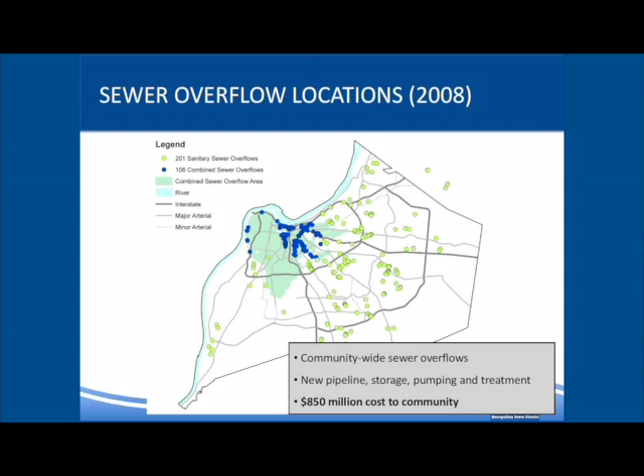On this slide, those in the lime green color are what we call separate sanitary system overflows, located out in this area. The blue ones are what we call combined sewer overflows. I'll explain the difference between the two, but the focus tonight is going to be on those combined sewer overflows, shown as blue dots in this part of the system.

We have approximately 106 of those, and we also have about 201 separate sanitary sewer overflows in our system. These overflows are community-wide and are subject to the consent decree projects you've heard about. There's a whole set of projects being used to remedy them, which I'll talk about momentarily. It's going to be about $850 million worth of expenditures for this program.

And it is a program that is not federally funded. It is funded by the MSD rate base. So we wanted to make sure you understood the motive and history of the overflow program.

Those overflows are something that in 1972 the Federal Clean Water Act was enacted by Congress and put into law, and a part of that Clean Water Act called for the elimination of sanitary sewer overflows. Translation: sanitary sewer overflows are illegal. It also called for the mitigation or control of combined sewer overflows in our communities. Under this program we are required to eliminate sanitary sewer overflows and control or mitigate the volumetric discharge of combined sewer overflows in our system. It is federal mandate, it is federal law, and failure to meet those dates will result in stipulated penalties and fines.

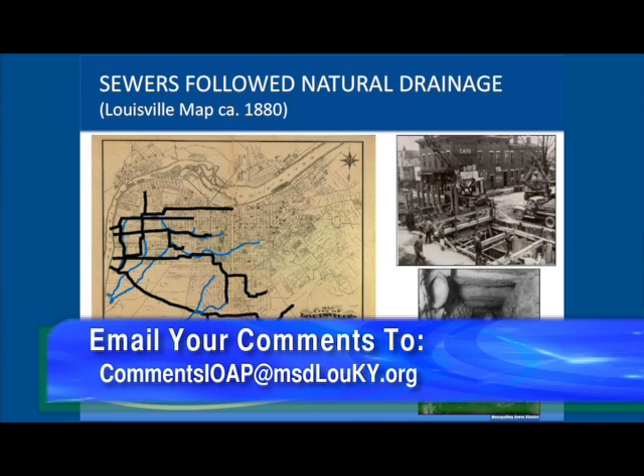Another historical point, what this map shows you, this is sort of the base map of Louisville around 1880. As you can see, there are some existing blue lines that were existing streams within the city system back around 1880. In the early 1900s we started building pipes to take on drainage and stormwater and move wastewater away from populated areas. Those pipes are shown in the black lines, and some of those pipes replaced some of the existing blue lines that were part of the system.

They were old brick sewers that were built in streams, and they became what we call combined sewers, taking both stormwater and sanitary water away from populated areas. At that time, those flows actually were piped directly into the Ohio River.

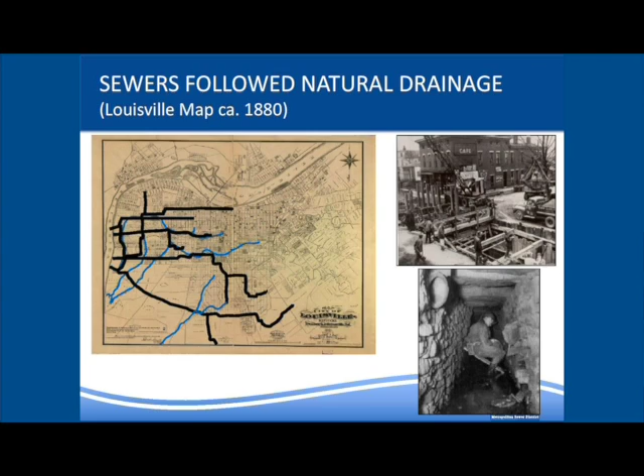So when you talk about the issue of drainage and sewers, it is a 100-year story. It's a story that infrastructure, not only in Louisville but across the country, are faced with aging infrastructure and issues brought on by federal mandate. An example would be we've got an $850 million program here in Louisville. The city I came from, Cincinnati, had a $3.2 billion federal mandate. So these programs and mandates are affecting a lot of Midwest and East Coast cities, and this is the primary history on it.

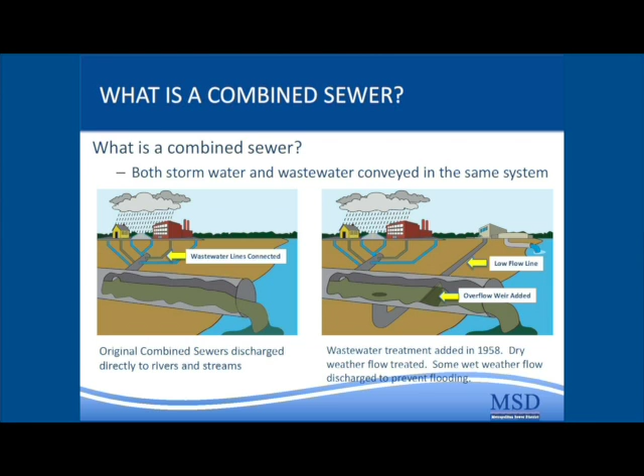We began the installation of treatment around 1958. A lot of the treatment goes to our Morris Forman plant, particularly in this area of town. But the difference is the separate sanitary system normally does not take on stormwater. The combined sewer does. The combined sewer technology was something built over 100 years ago, the best technology of the day, and in 1972 the Federal Clean Water Act changed that.

So when you think about combined sewer overflows or sanitary sewer overflows, our focus is what type of toolbox do we have to deal with these. There are really two types of projects we identify. One is what we call source control projects, projects that allow us to deal with stormwater or rainwater at the source, by the use of what we call green infrastructure - rain gardens, bioswales, those type of things. Focusing on source control with downspout disconnections on properties, residential homes, making sure sump pumps are not connected into the system because that is direct rainwater, and also sewer rehab to make sure our aging system through rehab or pipe replacement is not taking on a lot of infiltration. That's the source control approach.

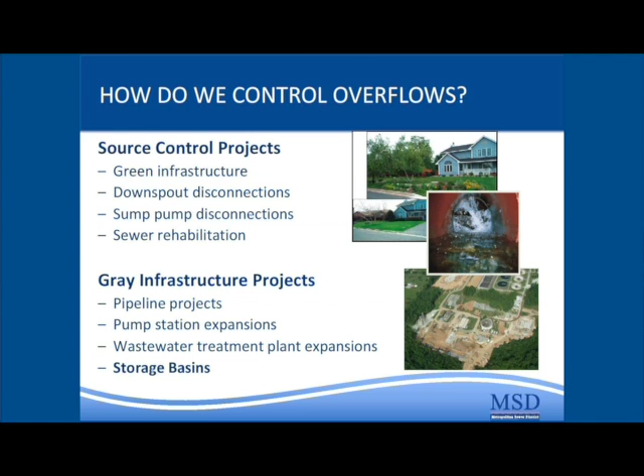The other approach would be what we call gray infrastructure, and these are more of your hard, large, complex pipeline projects - expansion of existing pump stations in our system, expansion of our wastewater treatment plants, or building large storage basins, which is the subject of this particular project tonight. That would be a gray infrastructure project.

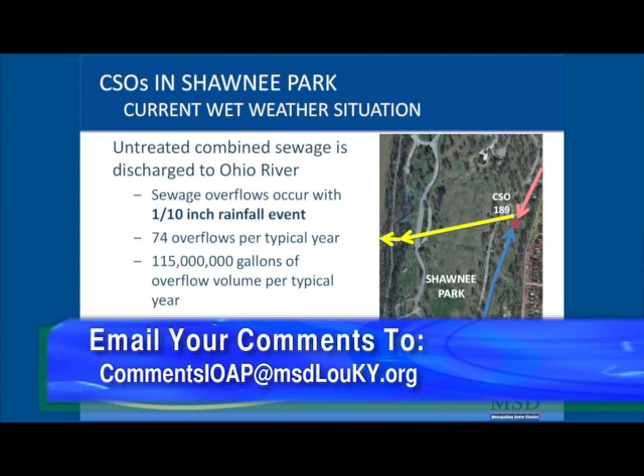As you drill down even further, the problem is there are identified combined sewer overflows that exist right at the Shawnee Park area, down in the Broadway area. Those large CSOs are CSOs that even if we get a tenth of an inch of rain, you will see overflow directly into the Ohio River. Volumetrically, you're talking about 115 million gallons of overflow in a typical year. Our objective with the projects we bring forward is to mitigate or reduce the amount of overflows from about 74 times a year down to about 24 times a year with this proposed basin.

If we go to the next slide, the project that we are designing in the concept phase is what we call a CSO storage basin. We'll just go conceptually on this slide to show what it's going to look like.

It provides temporary storage for wet weather overflows that otherwise would be directed to streams, creeks, or rivers. Once the storm or weather event subsides, we are then able to pump that wet weather back into the combined sewer when capacity is created, and then down to our Morris Forman Treatment Facility.

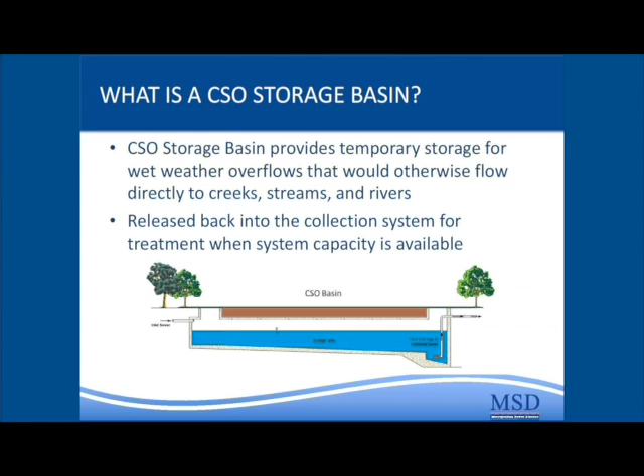Under the ground, about 40 to 50 foot deep, you're going to have a basin that takes on wet weather from two existing tunnels that already exist under Shawnee Park. This wet weather, the blue indicates the water, will be pumped back into the system once the storm event passes.

Some of the questions we've gotten regarding this project: will it create the potential for backups? The basin is designed to make sure that it's at an elevation that is going to be below basement elevation.

So no, it will not be a problem in terms of increasing potential for backups. However, we don't know the intensity of storms in the future—call it climate change, call it whatever. So no project, gray or green, is ever going to give you a 100% guarantee that there will never be flooding or issues, because we can't predict Mother Nature.

What happens when the basin is full? The system will function as it does today. When the basin fills up, water is reverted into the combined sewer system, will overflow and discharge into the Ohio River. That is if the basin fills up.

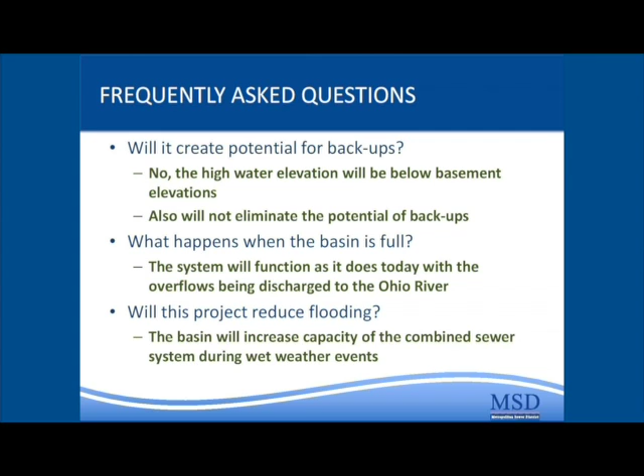Will this project reduce flooding? The basin will increase capacity in our combined sewer system, and during a rain event, when that capacity returns, it will have the potential to take on more water and alleviate flooding.

In our discussions with Metro Parks and other stakeholders, that particular building has potential to be sort of a foundation or a staple for other assets, and we'll talk a little bit about that later in the presentation.

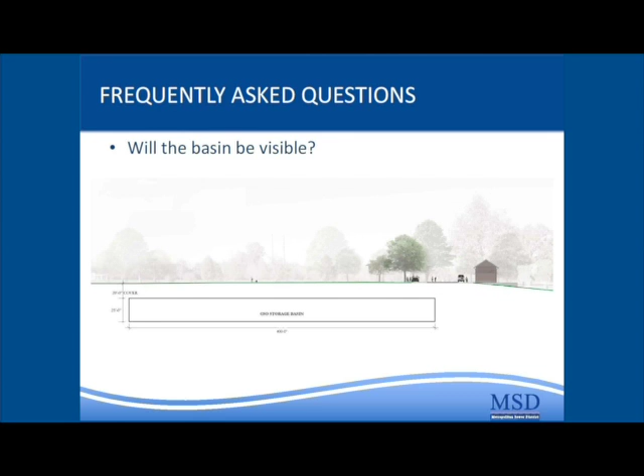But essentially, this is what it's going to look like from a cross-section view—again, something that is going to be 40 to 50 foot underground. It will be covered, and really the only thing folks will see is this building and our access hatches, which will probably be located on the same side of the building, similar to a one-story garage building. So that's what it's going to look like.

The other questions we get: what about odor? This project is mostly stormwater, highly diluted during a rain event.

It is underground, it is covered, and it will be equipped with rinsing equipment as part of the design. We've also seen that for these types of projects, odor control is not necessary because of the dilution of the water. But in this particular case, we are going to be proactive.

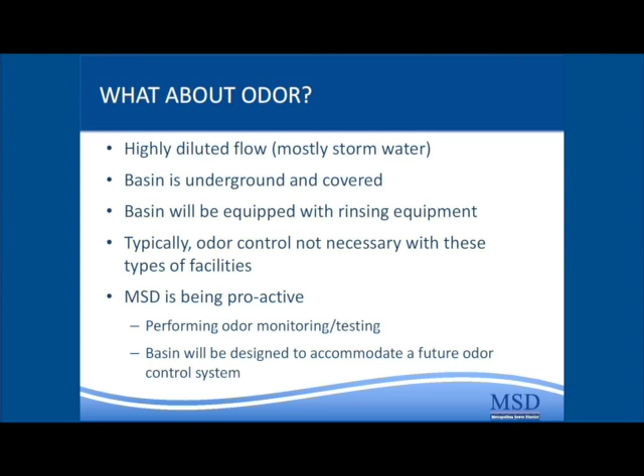We are going to have monitoring and do some type of odor assessment. We're also going to have the potential for future odor control built into the design of the project to make sure we can accommodate that if necessary. So we don't see that this is going to be an issue, but we are going to take steps to make sure we can incorporate that if needed.

So, the project itself is a component of our consent decree. The storage volume is 20 million gallons, as I mentioned before, able to reduce or mitigate the amount of times overflows occur on an annual or typical year basis from 74 to 24.

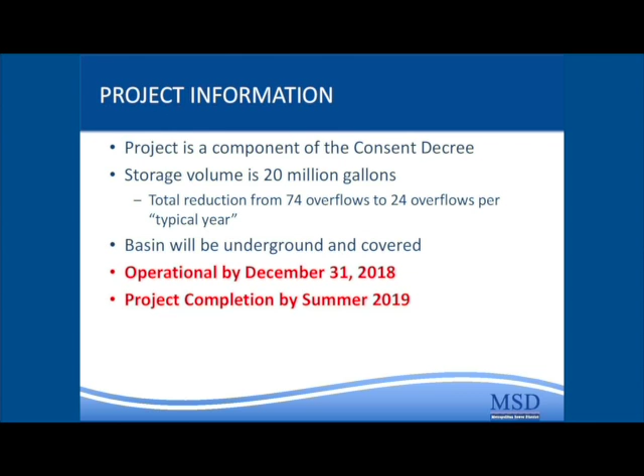It will be underground and it will be covered. The project needs to be completed and operational by December 31st, 2018, and complete construction and restoration by summer of 2019. So those are the basics of the project.

I do, at this time, want to turn it back over to Mr. Lockley, who's going to get a little bit more into where this thing is going to go and a little more detail on the design.

What you see here is we had to come up with some general sizes and general locations of where this basin is going to be. We had to come up with some preliminary areas and preliminary sizes so that we could come and talk to you guys. But predominantly, as Tony was talking about, the big issue is that we have the sewers that are in the area. That large pipe is here and the large pipe is here, so we have to collect that sewer somewhere in that area. That's why our basins are in that area.

Basically, the best two locations for our basin that we could talk about today and hope to get input from the public are these two locations. Location A, as we're calling it, is where the existing maintenance facility is, at the intersection of West Broadway and the Parkway. Basin B, the second location, is in what is referred to as the Great Lawn, or inside Loop Road.

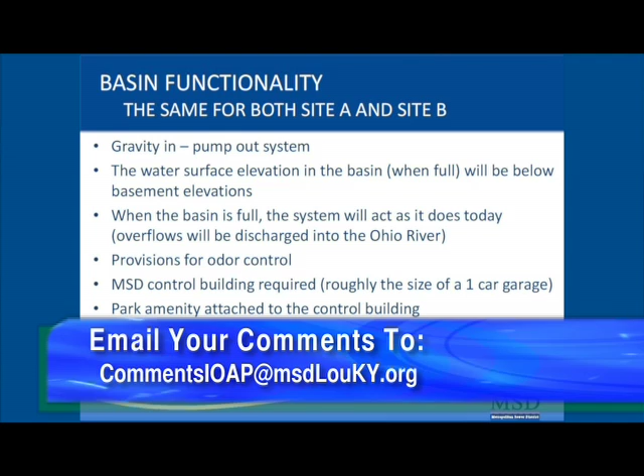So just some functionality with both basins. Some of the things that are the same with both basins, no matter where they are: these basins are going to be a gravity-in and pumped-out system. What that means is they will fill up, and then once the system is able to take the flow, there are pump stations in the basins that will pump and empty it out, very similar to a very large sump pump if you have one at your house.

That's the reason why we have to have a control building, because the control building will control the gates, the pumps, and the electrical components, and we have to have that above grade to keep the electrical components out of the ground and out of the water. The water surface elevation in the basin, when full, will be below basement elevations. We are doing everything we can, and ensuring we're doing surveys out there, that the elevation when the basin is full will not cause basement backups due to the basin being out there.

And then, as Tony talked about, when the basin is full, the system will act as it does today. Today, you basically have tunnels that are basically long basins—that's how they work today. They're 15-foot diameter, 16-foot diameter. They fill up with water today when it rains, they stay full with water, and then as the rain and storms pass, they drain. So it's going to work the same as it does today.

The one thing about the basin—and the other reason why it's designed this way—is because of the odor issues. Typically with these types of systems, the odors come from stagnant water that's allowed to stay for a long period of time and become septic. These basins are designed to keep the flow moving, and they're designed with the pumps to be emptied within 24 hours, so there will not be the opportunity for anything to remain in the system that could become a problem.

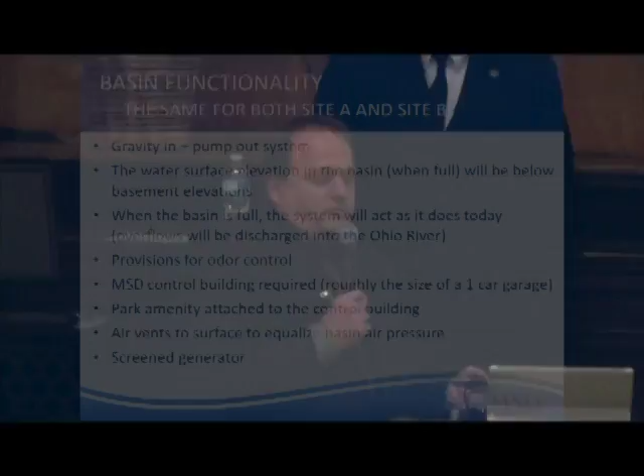Provisions for odor control: we will put everything in place. We will put the ducts, the equipment, the conduit, the power, so that if there is a situation where there may be a need for odor control in the future, we can quickly come in and insert the chemicals or the carbon canisters or whatever the odor control equipment may be. We don't anticipate any odor control, that's why we're not putting it in, but we are putting all the connections, the piping, the HVAC and everything, so that if it is needed, it's equipped. It's not quite as simple as plugging in a light bulb, but we can go on site, put the equipment in, and go forward with it.

There will have to be, as previously mentioned, a control building for either side, and it's roughly the size of a one-car garage. As Tony stated, we had to put that building there, but we worked with everybody—there are things we could do as part of that building, and leave behind, like an education center or some sort of park recreation site or something. There are some things we could talk about.

The park amenity is attached to the control building. There will be vents—this is a question that's asked a lot. Again, today, the system is vented.

This is going to be a large underground basin that is full of air. When it fills with water, that air has to go someplace. If we don't have the vent in the system, then manholes blow or the structure gets damaged. So it will be a vent system, but it works the way it does today. Those pipes, when they fill with water, the air escapes out of catch basins and out of the manholes, as it does today—no different than the way it works today.

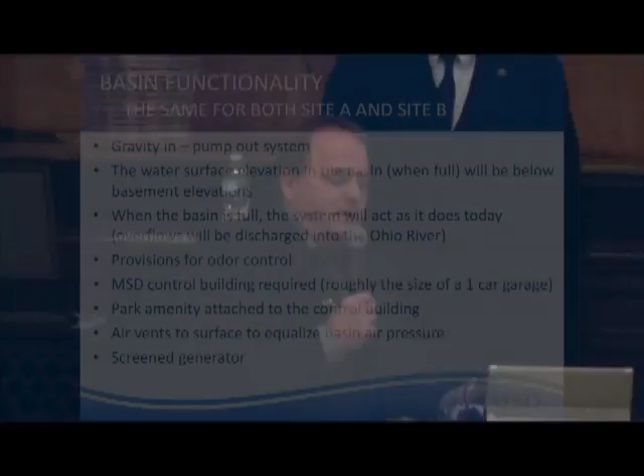And there will be a screened generator to ensure that we don't flood the site and don't have issues. If power fails, we will have a generator that will be able to operate the site 24/7.

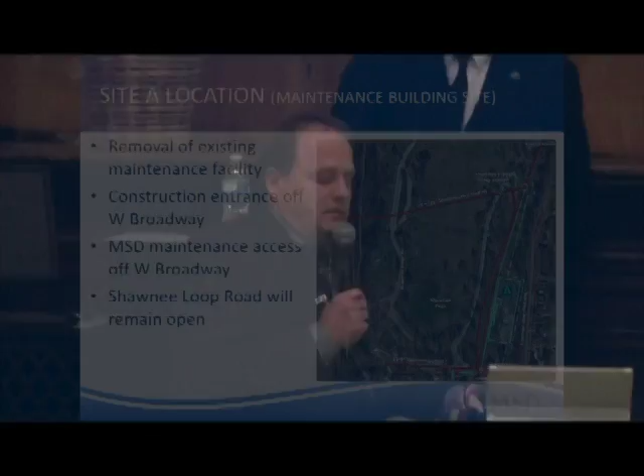So real quick, moving into the locations. Site A, again, is the area where the existing maintenance building is today. It's removal of the existing maintenance facility.

The construction entrance and the way we will get to it to do construction will be off West Broadway. The maintenance access, MSD maintenance access, will also be off West Broadway. So during construction, our equipment and trucks will be getting in and out that way. And then once it's built, we'll have to operate and maintain it—that picture you saw where the MSD pickup truck goes and operates it, that's how we'll access it. We'll basically be using the access that's there today for the maintenance facility.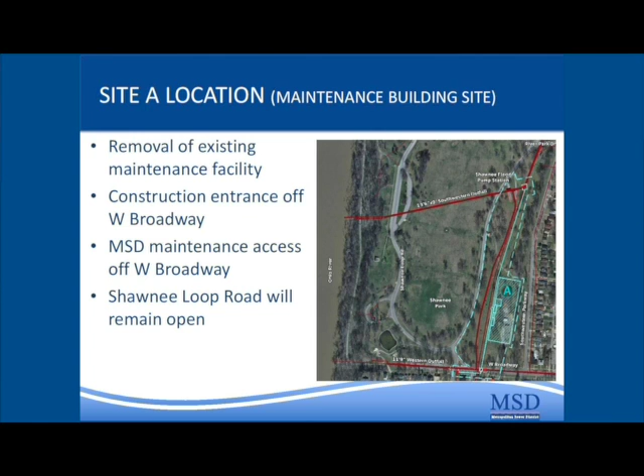Another part of this: since we are staying within the loop road, it will remain open. There is a dotted line that goes around showing the area where the contractor will be doing his work and storing his materials. All the main activity during construction of this project will be in that area of Loop Road.

So advantages: limited disturbance to the public areas during construction. The majority of that area I talked about is by the maintenance building, so it's not a big public area. It utilizes the existing access off West Broadway used by the public parks today. The Shawnee Loop Road remains open. And we avoid the flood protection system.

The further we can stay away from the flood protection system, the better, because there are pipes and conveyances as part of the flood protection system that we really don't want to get into or damage. As for our building, nothing has been established yet, but there are opportunities—we have to have the building.

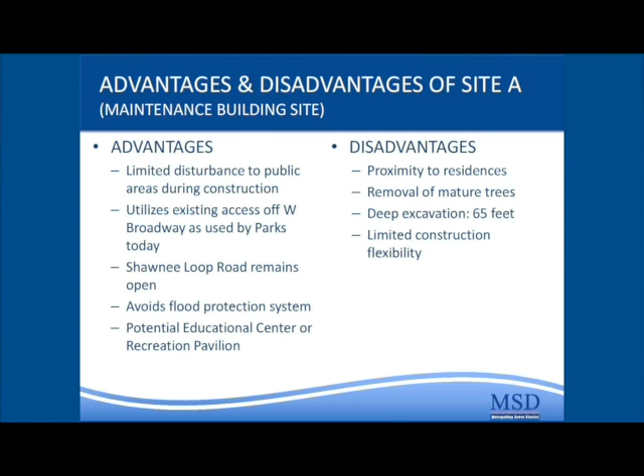We can turn that building into maybe an education center, a recreation pavilion, something that could be used by the public in the park. Some disadvantages: being that close to the corner of the intersection, there's proximity to residents. There is removal of a lot of mature trees in that one corner of the park. It's deep excavation—moving further away from the sewer pipes means we have to go deeper. And because we're staying in that corner of the park, it's limited construction flexibility.

So Site B, or the Great Lawn site. The main sewers come in here, at the flood pump station. The flood pump station was put there to help control the combined sewers, placed by the Corps engineer for a reason. This is where all the main sewers come in.

So this was the other location we could put the basin. The construction entrance would be off Southwestern Parkway. They could take the exit, take Muhammad Ali, come in, and then take River Park back out. The Shawnee Loop will be partially closed—there'll be a portion of the road that will be closed, but we can still work with parks to where you could come into the park with this access, go around, and use this other access. But there will be a portion of the park that is closed.

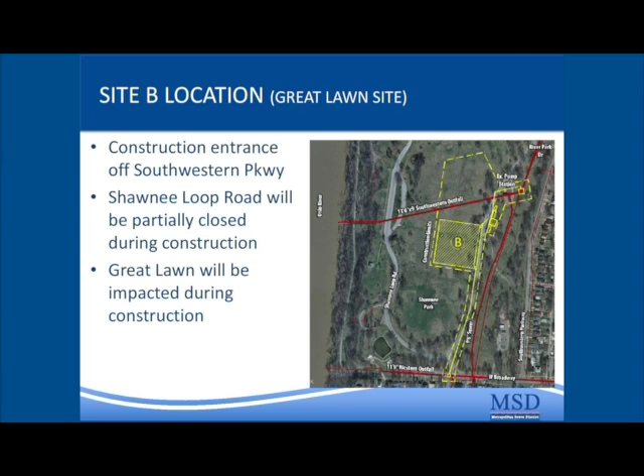And the Great Lawn will be impacted during construction. It's obvious—we're in the Great Lawn, up near our existing flood pump station where the sewers are, and some of the staging and storage area the contractor will use will be this portion of the lawn. So that's where some of that will be used. Some advantages: we're further away from residents.

They'll be screened, there'll be the trees, and the noise will be further away, pushed away from the residents. It's a reduction of tree impact.

The only real trees that will be taken out with the Great Lawn option is where we do those collector lines, where we have to go where the sewers are. It utilizes the same route that we use today to access the flood pump station, the same route we could use today to maintain it.

More construction flexibility. It's pretty obvious having the bigger area of the Great Lawn is more construction flexibility. A lot of contractors come in here and do the job. Reduced basin depth - the basin is 15 feet shallower in that area, which also helps with constructability, and the time of getting in and out.

It reduces and avoids flood protection is the same with both options. Our control building, we could possibly turn it into a potential education center or recreation pavilion.

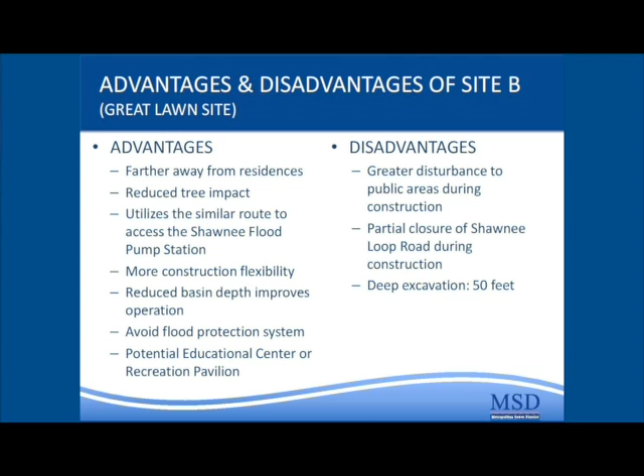Some disadvantage to point out is we are disturbing a greater area of the park. And then, as I mentioned, a section of the park road will be closed during construction. And although it is 15 feet shallower, it is still deep excavation - it's 50 feet.

And we just kind of wanted to put them back up together so everybody could see them. Again, here is Area A, the existing maintenance facility at the intersection, West Broadway, the Parkway - the area of disturbance where everybody would do their work. And then the one thing I did fail to mention in the other options, as Tony mentioned...

This little square here represents our control building. We only put it there to show you that we have to have a control building in some area. The location hasn't been determined.

So like, for example, here we have the big block that's underground - the big rectangle or the big square, that's all underground. When the restoration is done, it'll look like it does today. But as we talked, there will be a control building.

On this site, we just put it here as a reference point because it was close to the existing access road. It could be anywhere once we talk with folks and get an option. And then the same thing here, we just put the control building as close as we could to our flood pump station, figuring there was already a building there for that flood pump station. We could put that building there and work on it. But all these sites and locations can be further discussed once we know what sites we're going to be at.

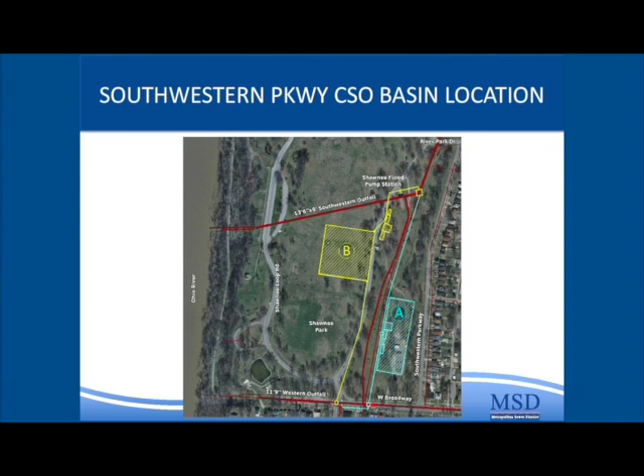Disturbance to public areas of the park during construction - being in the Great Lawn, you are going to disturb more of the park. The reduced tree impact, there will be less trees removed, and significant in the Great Lawn. It's open today - Shawnee Loop Road remains open during construction.

The entire Loop Road can remain open with Site A down in the corner. Portions of the Loop Road will have to be closed. However, maybe we could work with Parks - we've already had an idea to where they could have two-way temporary traffic on Loop Road. You can come in one way, so a section where maybe you couldn't go straight in, but you could still come in some different ways to get into it. But a section of the road will be closed.

Utilize existing access off West Broadway used by the Parks today - that's a benefit, the same access is used for Site A. Utilizes the similar road today that we use for the flood pump station - that's Site B. Reduction of depth.

We talked about that. It's also shallower for construction, but it also is shallower for our operation and maintenance. It's 15 foot less that our guys have to go in if they have to enter the basin to work on it - the safety equipment, the fall equipment, the OSHA standards that we have to get into, so it would be a shallower and more friendly operation and maintenance building.

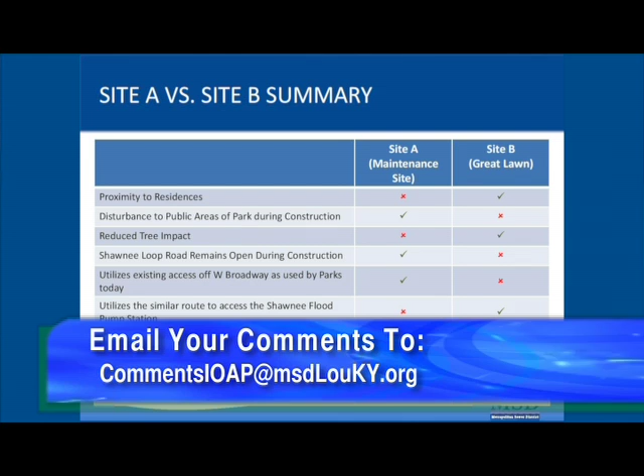Available construction flexibility - I mentioned Site B with the greater open area of the Great Lawn would have more space for the contractor to work. Potential education center or recreation pavilion, it's a positive for both - we've talked about that for both sites. And then being where we are able to be out of the flood protection system, which is a great asset to everybody, is a positive for both.

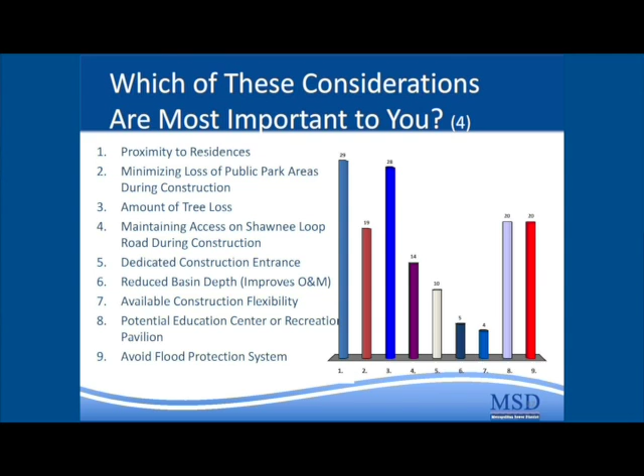So to me, the top four are proximity to residences, the amount of tree loss, and then potential education center or recreation pavilion, and then avoiding the flood protection system is also very close to minimizing loss of the public park areas.

So now very specifically, on a 1 through 7 scale, 1 being very unsuitable — no, don't want it, very unsuitable — to 7, and then we click it twice, 7 being very suitable. Please, this is the one vote. Site A, which is the maintenance building site, what would your vote be? In your opinion, is the maintenance building site very suitable for the basin or very unsuitable? And you get one vote. And again, like the other, it'll take the last one.

Why is it necessary to put it in Shawnee Park? Several sites were reviewed, and it came down to this: the further away you put the basin from those overflow locations, the more expensive it is, since you have to add more conveyance, more pipe, and more disruption to the area. Also, part of our IOAP and consent decree is that we were not going to displace homes. So if you wanted to put it anywhere else, for example on the other side of the parkway where the CSOs are, those are all homes, and they would all have to be bought and destroyed before the basin could be built. So simply, this is the area where the CSOs are, the 16-foot diameter and 15-foot diameter large pipes, that's where they are, so that's where the basin has to go.

There's a question about the trees involved in tearing it down. The preliminary estimate right now is about 5-to-1 between the two sites, maybe 4-to-1 in some areas. Once we get the exact site location and determine amenities, like whether there will be a pavilion, a building, or recreational features, we can give exact counts. But as far as tree count goes, it's about a 5-to-1 ratio, since Site A has all the trees along the parkway, versus the open field where the Great Lawn is.

Is building it in Shawnee Park the best way to combat sewage overflow, or the cheapest? The answer is yes to both. Part of our consent decree, we had to put a project in place. It's ratepayers' funds, so we had to put in not only the best solution, but also the most economic solution for the ratepayers. So the true answer to that is yes to both.

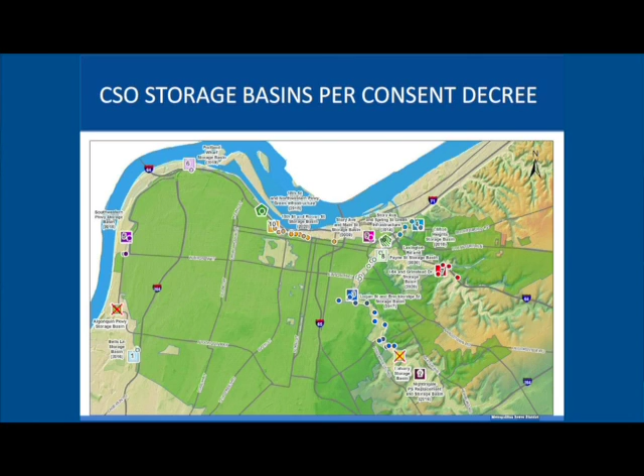The flows that are happening here, basically this is the area that used to be the old Pond Creek. That is what nature wants to do. Right or wrong, to help with sanitary conditions and living conditions in the early 1900s, we piped it, we put in a solid pipe. That is where the infrastructure and the flow is coming from. But what is coming through this area we're seeing is this watershed. These are the pipes, sewers, and the combined system that flows to this area. As you can see, this area is concentrated - you're not having a lot of flow from the east. It goes in a different direction.

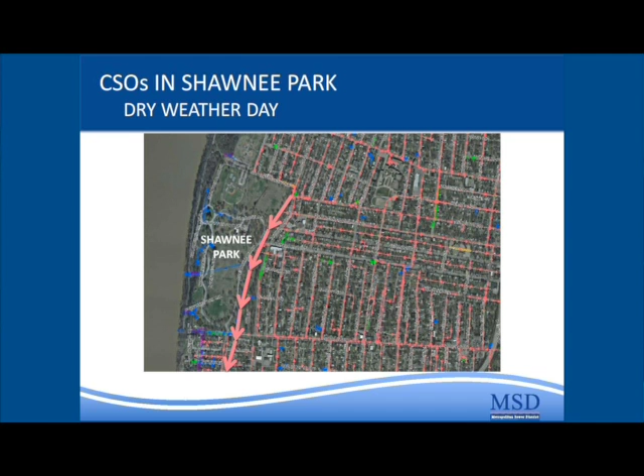What will you do when you construct a basin to make sure children are not able to fall in? How long will the park be closed in certain areas? That's a very good question. It'll be the requirement of the contractor to secure the site and have it policed. I'll knock on wood, it never happens - I've been at MSD since '91, and we've never really had incidents where people have been able to get onto our sites and have issues. Somebody has to really be determined to break into one of our sites to have a problem. So that is secure.

How long will the park be closed in certain areas? The park will be phased. The estimated construction window for this project is a total of 30 months, so that's 2.5 years. Some of the significant construction, like while we're building the basin and digging the hole, the park will have limited access just for that major construction. But once the hole is backfilled, after a year and a half or so, some areas can be reopened because we won't be doing significant excavation anymore. But off and on, areas of the park will be shut down.

Where is the line to the water treatment plant currently, and will there be consideration to dampen noise during construction? The line to the existing treatment plant is that red line—I don't have the pointer, but it's this large red line that comes down here, and that's what goes to the plant. The Broadway interceptor comes in and ties into it, and it goes into the plant. You have the western interceptor, the western outfall, and then the Broadway interceptor.

When these lines become overwhelmed, to avoid backup or overflow at the protected residences, that's where these CSOs kick in. So when the flow becomes greater than these pipes can handle—normally it can be treated at the treatment plant—but when these overflows occur, that's what goes into the Ohio River. The intent of the basin is that all that will be stored there, and then once the project is back on, for example, if it's in this location, the overflow will occur, go into the basin, and then be pumped back through this line to that sewer, which takes it back to the treatment plant.

At this location, the overflow will occur, it comes to the basin, and then it'll be pumped back to a line that would take it back to the treatment plant. So that's the other reason. The further we move these basins away from these lines, the more of those conveyance lines we have to construct.

If I did not read your question, in an attempt to help with what's going on here, a lot of them I thought had some of the same questions, so I tried to combine them. If you think I didn't do that right and didn't answer your question, please let me know.

The potential damage, as I stated earlier with the same question, is that there will be a pre-construction survey done in the area, to the homes in the area. They do video, they do survey, they do the best they can. The last thing contractors want is to go into an area and have damage to homes. It doesn't help them, doesn't help their reputation, doesn't help their bottom line and profit. So there are pre-construction surveys done out in the area. It gives us the information and the data, and if something happens, we have that data that we can compare to the post-construction or the potential concern. And if there are issues, it gets turned over to the contractor's insurance company, and it gets handled that way.

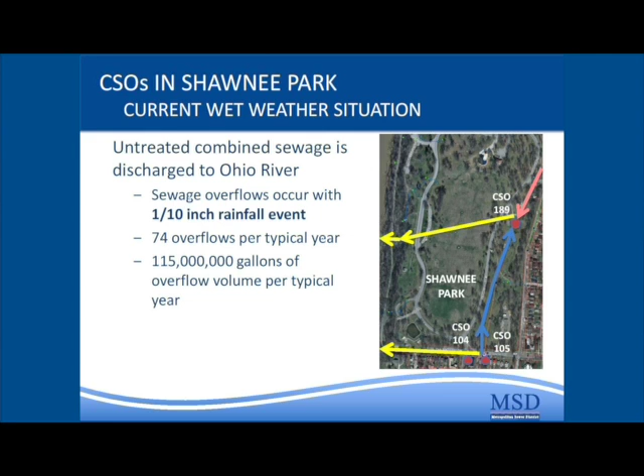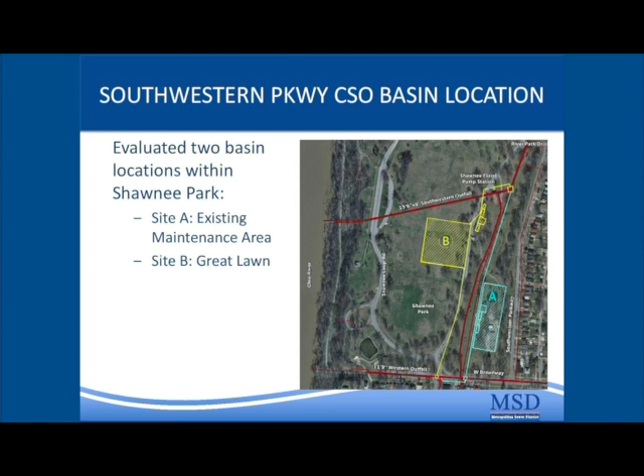And when you think about the size of these basins—20 million gallon basins—if we move those basins, all of this network of piping necessary to intercept flow from this CSO or that CSO will have to follow the basin. So whether you move this basin up here, down here, or down here, all of that piping needs to follow that basin. Wherever you go, there's going to be a swath of destruction that follows those basins. Those basins are the only remedy for the amount of volumetric overflow we're seeing on an annual basis at these CSO locations.

We know this is an impactful project. It is a large project. The problem exists with the existing CSOs, with assets that have been under the park for over 100 years. The remedy for those assets and the mandate we're facing is best located right where those problems or overflows exist. If we go back to the other slide where we saw the size of the tunnels, these are huge existing tunnels. The farther we move away from those systems, the more we have to have adequately sized piping to get to the basin or the reservoir. So these are tremendous tunnels—you can see with someone standing there, these are not very small pipes.

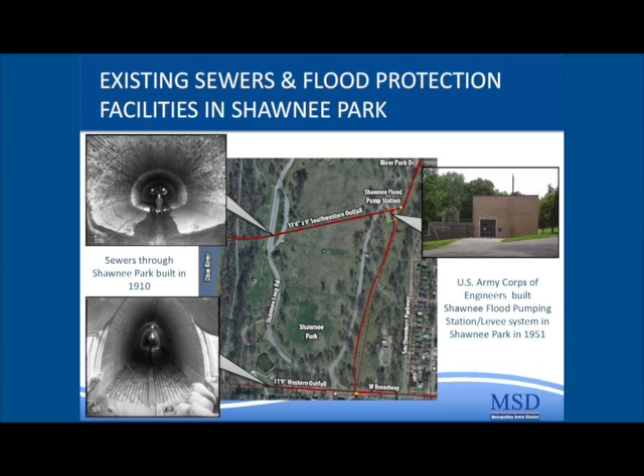These are huge infrastructure assets. And so the farther you move it away from the combined sewer overflow, the swath of destruction becomes larger. And so that's why we're trying to get through the concept phase and addressing the problem, and the problem exists at this location where the CSOs are. And again, it's a remedy or a tool that we're using throughout our system for other CSOs, and there's a total of 9 or 10 of these basins being built throughout the district.

One of the things we want to be able to do is come back in December, but in order to do that, we do want to go back. I know a lot of you still have your clickers with you, right? We've gotten through a lot of the questions. We want to go back and allow you to use the clicker again regarding Site A versus Site B, and also the process we've put together tonight so we can improve upon that for our next meeting in December. So we'll go back to the questions. If you have your clicker...

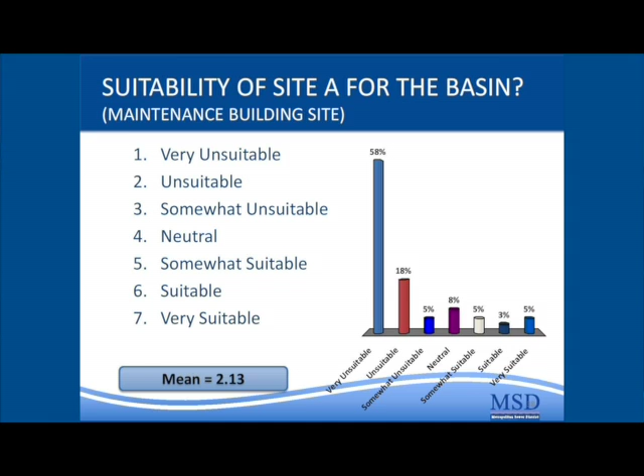So a much bigger swing on the unsuitability for Site A. Real quick, we're going to reset this. So now would everybody please use their clickers to vote for Site B, which is the Great Lawn.